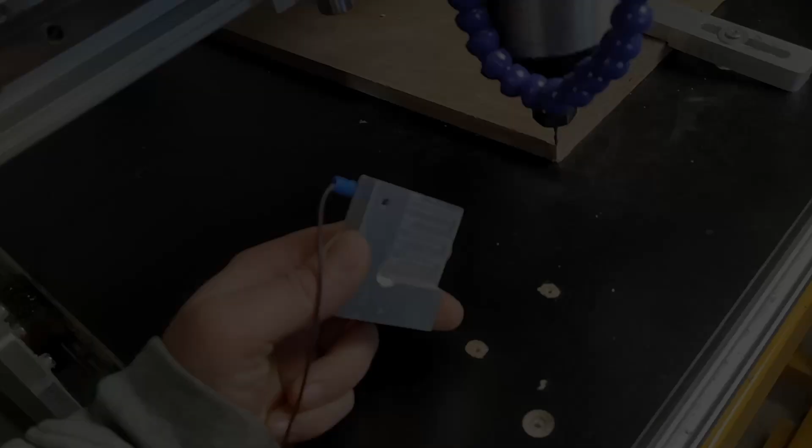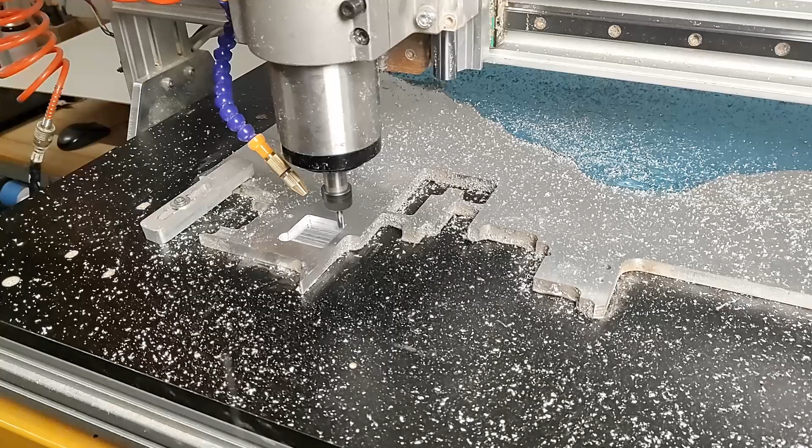In this video I'm going to show you how I made this probe in order to easily find the X and the Y 0, also the Z 0, but for that I already had a probe. I'm going to model it, make the Gcode, go to the CNC and mill it, and you will see along the way that I made some mistakes and I'm going to tell you how to fix them, how to make everything work as it should.

In the end, I'm going to show you how to set up Universal Gcode Sender and how to use the probe module in order to easily find the origin whenever you have a workpiece that is not in the origin of the machine. So let's get started.

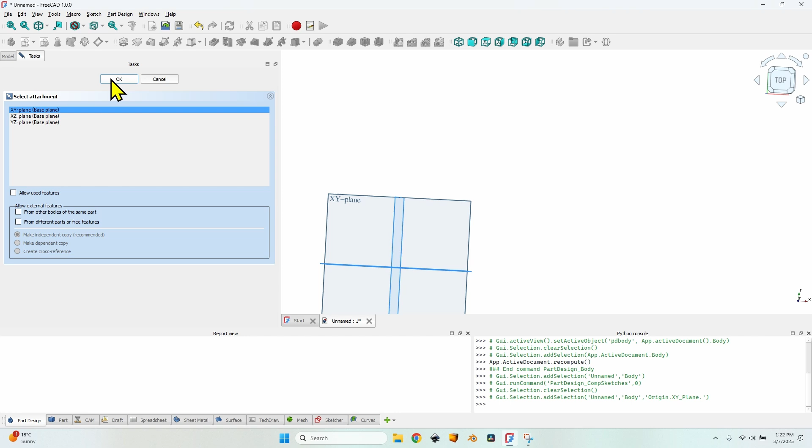Create a new sketch in the XY plane. And in this sketch I will define the overall shape of the probe, which is going to be a rectangle 60 mm by 60 mm. As you can see, setting the dimensions in FreeCAD 1.0 is much easier than in the previous versions. The sketch is already fully constrained. I can close it and make a pad of 12 mm.

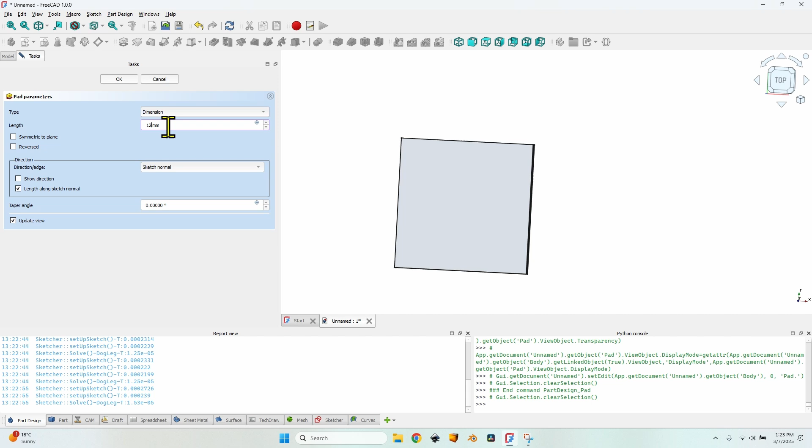You might ask why 12 mm? That is because 12 mm is the thickness of the aluminum plate that I had around. That's what I'm going to use, so if you are using a different thickness, don't forget to modify the length of the pad. Now I can close the pad, and after selecting the top surface, I will create a new sketch.

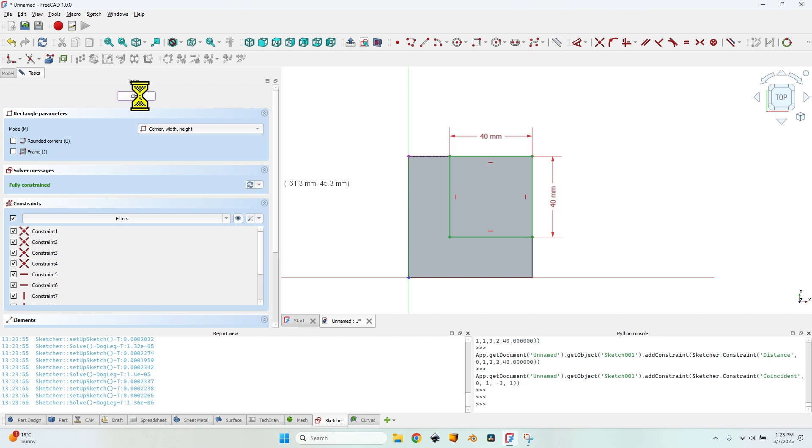Using the external geometry tool, I will select the top line and then make a new rectangle starting from here, and now I'm going to make it 40 by 40 millimeters. The sketch is fully constrained. I can close it and make a pocket using this sketch, and I'm going to mill half of the total thickness to have 6 mm for the probe.

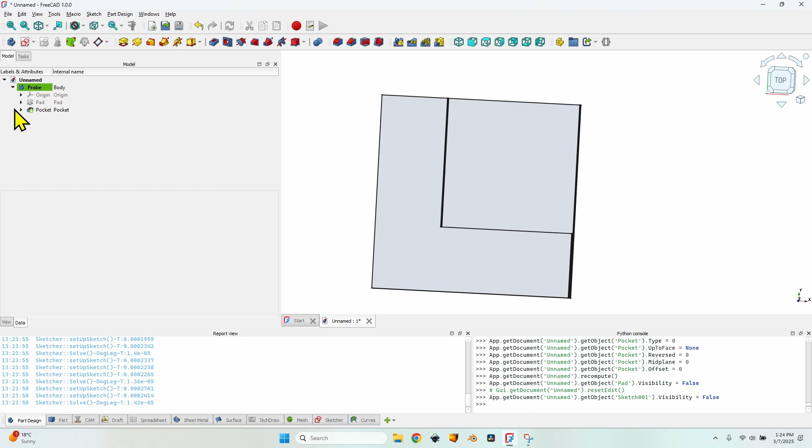What I don't like about this rectangle is this corner, which will result in a round over here because of the toolbit, and I want to have a notch here in order to be able to correctly fit it on the material. For that I'm going to edit the sketch a little. Let's zoom in, and I will create a circle close to this corner but not exactly in the corner, and I will give it a diameter of 12 mm.

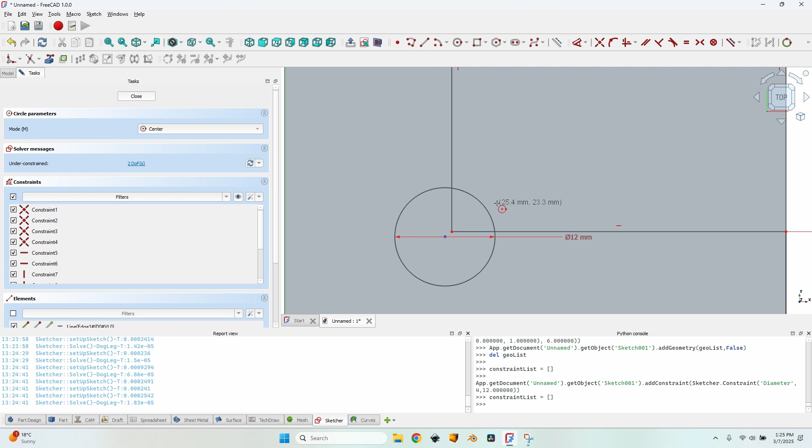Why 12 mm? Because the toolbit that I'm going to use is a 6 mm toolbit, and I want it to easily enter in this little notch to avoid any kickback, any damage to the toolbit. Using double the diameter will make sure everything is okay. Of course, this kind of sketch with overlapping lines is going to throw an error, so I'm going to select the trim tool and remove these 3 lines.

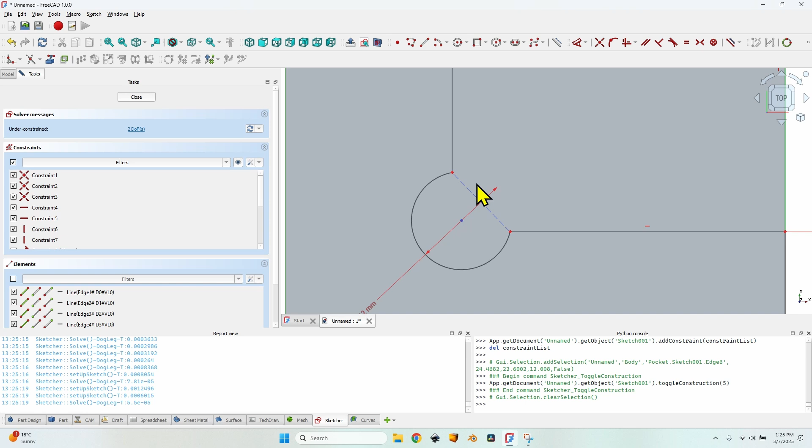Now I want to position the circle, and for that I'm going to create a new line between these 2 points. Right click and select the line again, turn it into construction geometry. This means that this line is not going to be taken into account when making pockets or pads. And select the line, the center of the circle, press KD to set a distance, a free distance, and I'm going to use a 2 mm distance.

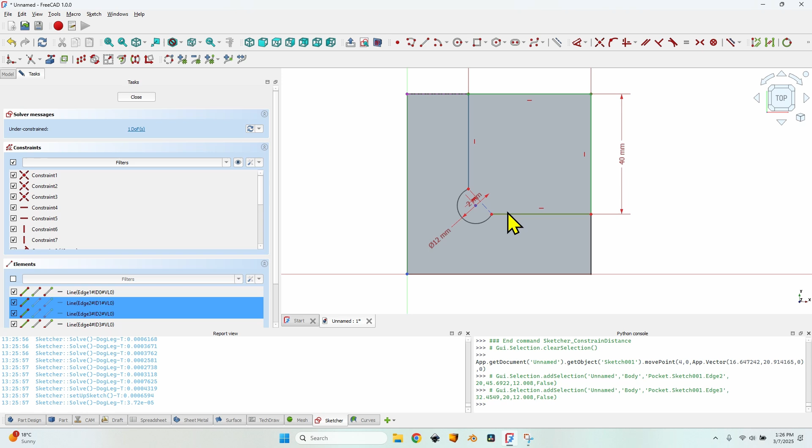After that, as you can see, I still have 1 degree of freedom in the solver messages box, which is this movement. I want to make it fixed. For that I will select this line and this line, press E to set an equal constraint. Now, since these 2 lines are equal, everything is perfectly determined. Closing the sketch will reveal the new pocket, because as you remember, I've edited the sketch in the pocket already created. I still need to do one thing, which is a hole here, a hole for an M5 screw.

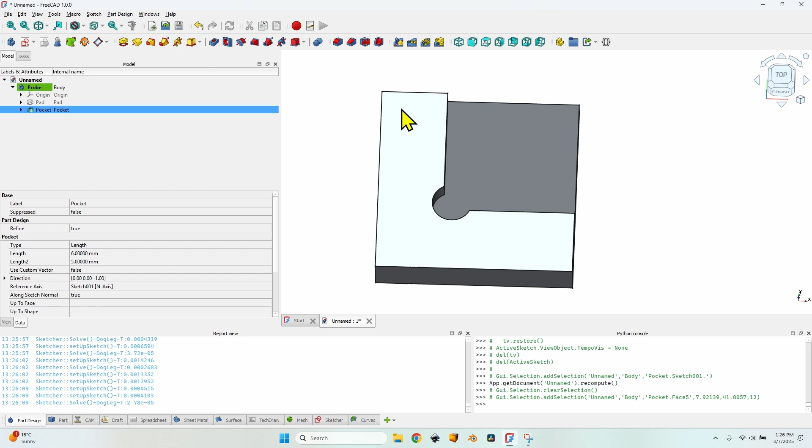I'm going to make the hole a little bit smaller, of course. The diameter of the hole for the M5 screw is 4.2 mm. So let's create a new sketch. Create a circle of 4.5 mm. I'm going to use a slightly larger diameter because the toolbit will have a little bit of deflection. I want to make sure I won't damage the tapping tool, so I'm going to use a slightly larger diameter.

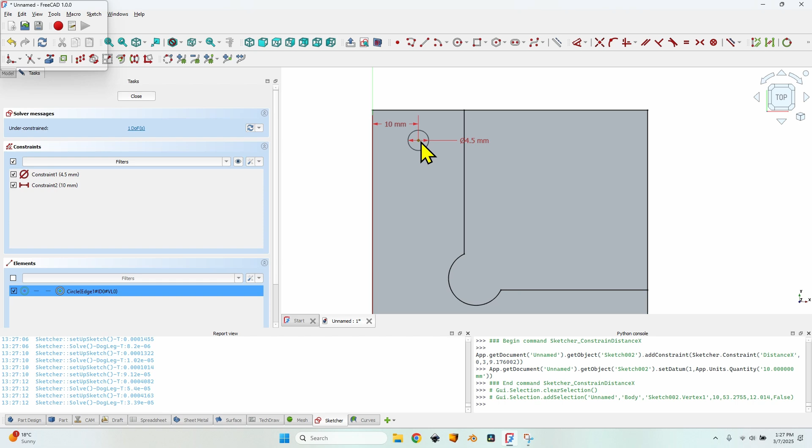I will select the center of the circle, place it in the center, so 10 mm, and a vertical distance of 50 mm. Close the sketch, make a pocket. This time I'm going to use the through all type. Now the probe is ready, I have everything that I wanted to have, and we are going to the CAM workbench.

I'm going to select the object, create a new job, click on the OK button. In the setup tab I won't change anything because I've modeled it starting from the origin and the origin is correctly placed for the machine. I don't want to change anything. Let's go to the tools menu, click on the add button to add a toolbit. I'm going to use the 3.175 for the hole and add a second toolbit, the 6mm end mill for milling the pocket and the outline of the probe.

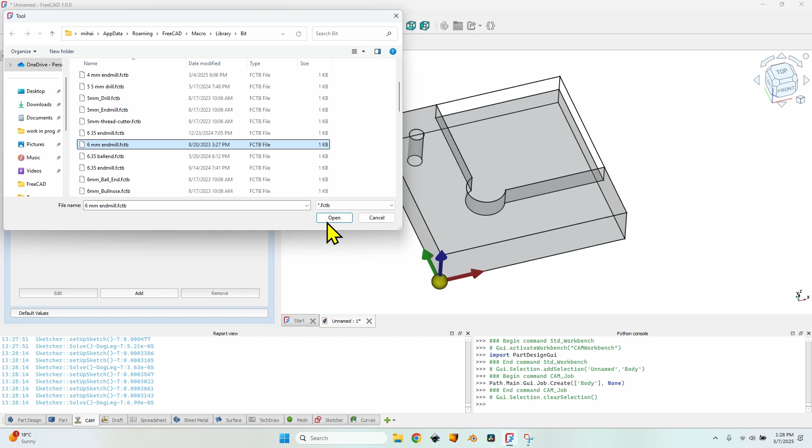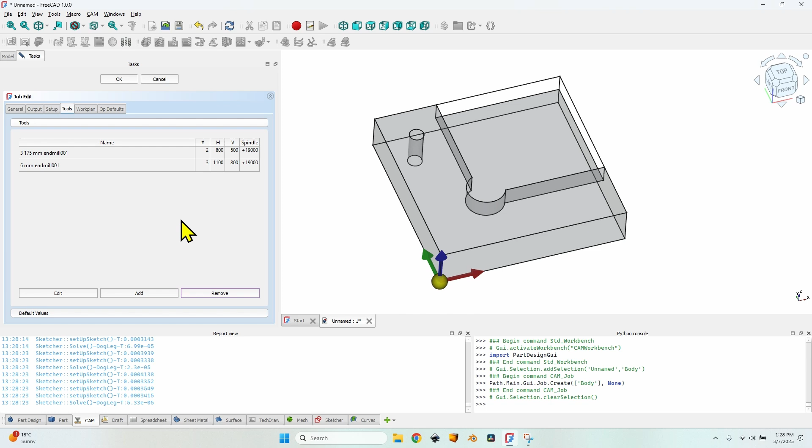Now let's give them some speeds. Since I'm milling aluminum and I will use a step down of 1mm, I'm going to use smaller speeds for the 1/8 of an inch toolbit and the spindle of 19,000, and for the 6mm end mill I'm going to use a slightly larger speed. The same spindle speed, and I will remove the default tool. It is useless here. It was there just to be able to create the job because it needs to have a toolbit. I will click on OK to close the job, and now let's start creating the operations.

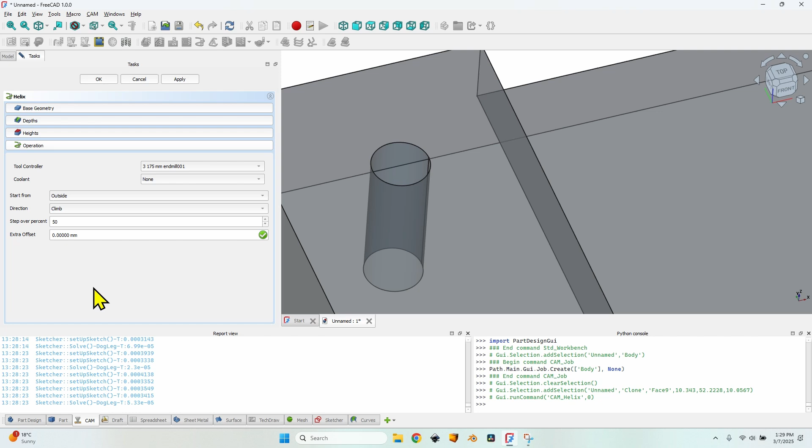First I will select this wall and the Helix tool. It will ask me which tool controller to use. I'm going to use the smaller toolbit. Click on the OK button. Let's go to the depth tab because the default step down is the tool diameter. I don't want that, but I cannot edit the value by simply clicking here, so I will have to edit the expression. I will click on the clear button. Now I can edit this value. I'll write 1 for a 1mm step down. In the operation tab I don't have to change anything because it's a very small hole, so just click apply, make sure the toolpath is OK, click on the OK button to close this operation. You can see it here in the list.

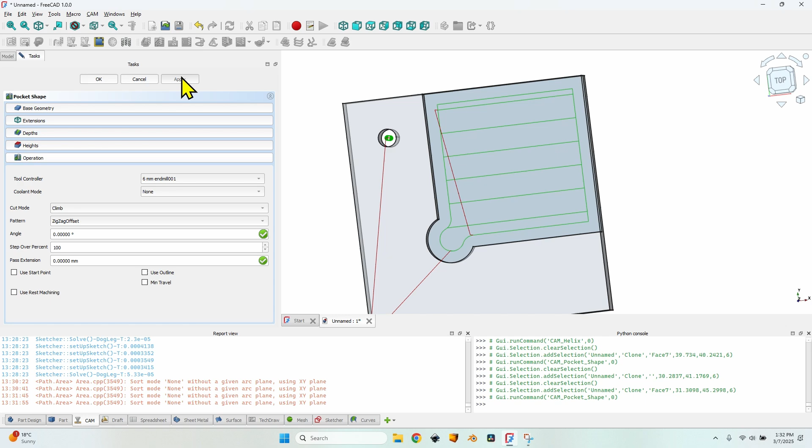Now let's create the pocket for this cutout. Select the surface, click on the pocket button. The first thing that I want to do to remember is to change the tool controller. The default tool controller is the one used for the previous operation, which is the smaller one. I'm going to select the 6mm end mill and click on apply to see what happens. As you can see, it's a horror toolpath, and that is because of a few things. First, the pattern, change it from zigzag to zigzag offset. And I want to change the angle from 45 degrees to 0 degrees, which means along the x-axis. I'm doing that because my machine is much more solid on the x-axis and I want to use that axis as much as possible. If I rotate the view, I can see that I only have one pass, which is absolutely too much for milling aluminum, or at least on my machine.

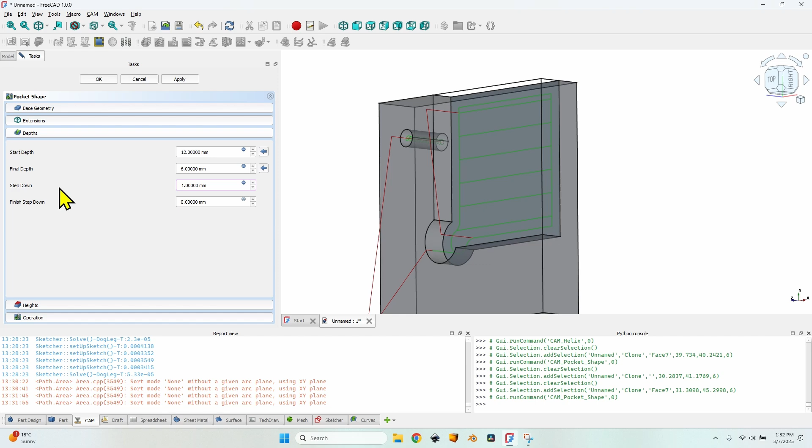So let's go to the depth tab and change the step down. Since it's a 6mm end mill, the default step down is the 6mm. I want to change it into 1mm, but I cannot click here and edit because it's based on an expression. So I have to click this little blue circle, click on clear to remove the expression, and now I can write a step down of 1mm, click on apply again, and as you can see, I have several layers.

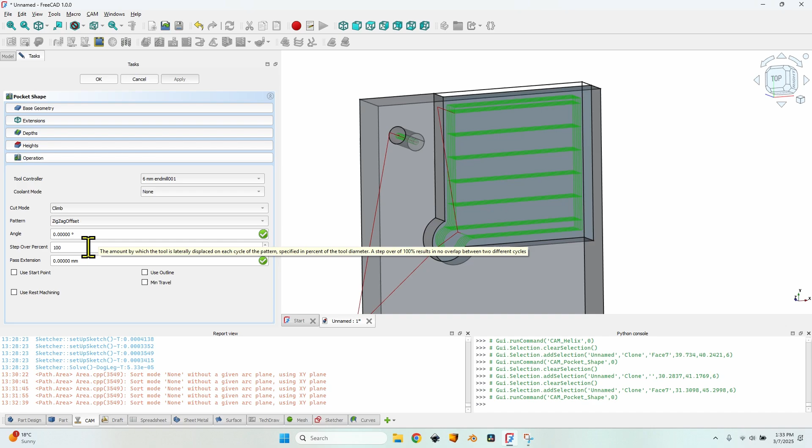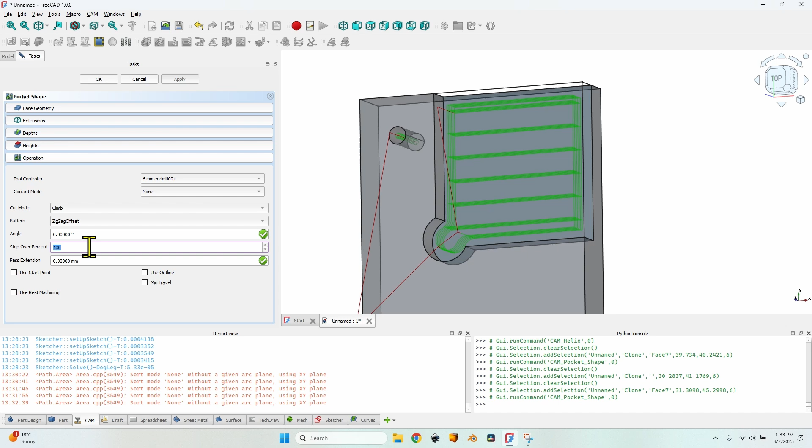One last thing that I had to think about in the operation tab was the step over. The default 100% removes as much material as possible, and I thought, well, it's just about material removal, so I can leave it like that and everything will work okay. But here comes the first mistake that I made. Using a 100% step over, and because the toolbit still had a very small deflection, left some very thin shims in the center. I could have removed them using a file, but I think it's much better to have a flat surface from the CNC. So I went back to FreeCAD, changed the step over from 100 to 80%.

The last operation that I want to create in FreeCAD is the cutout, the profiling. But there's one little thing that I missed when creating the pocket. I was very nervous because it was the first time that I was going to use only air cooling. Until now I used some hand spray with a cutting oil, and I had this small improvement to my CNC, the compressed air nozzle, and I wanted to see how it works in aluminum without any liquid, just with air. Because I was thinking about that, I forgot something.

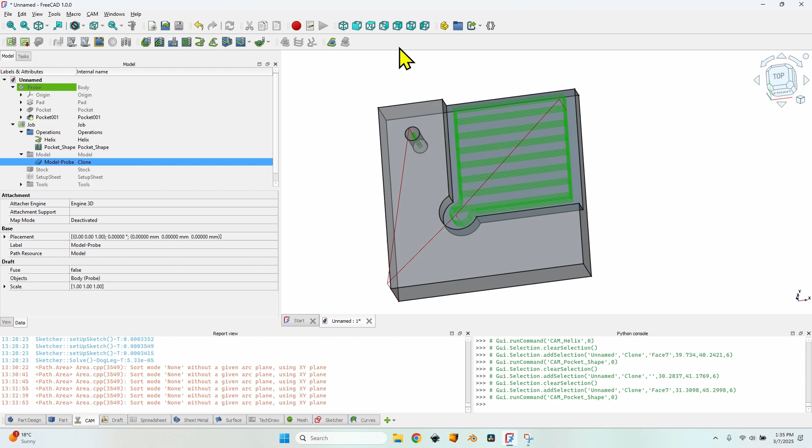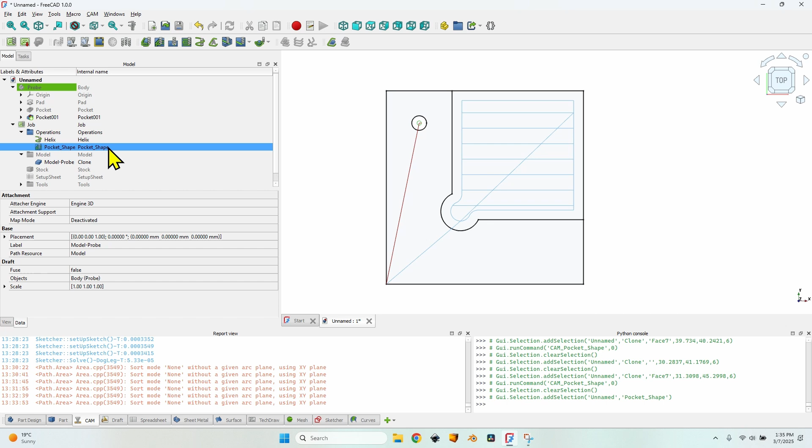Let me show you from a top view, and you can also see on the piece here. The corners had small roundovers. In my situation, because I realized that just after milling the piece and removing it from the table, I used the file and I removed that material. I don't suggest that. And let's fix this in the pocket shape operation. So open the operation, go to the extensions tab, check the enable extensions and check the face that is here. You can click on it and see its outline. Now if I click apply, you can see the toolbit is going to go all the way to the corner of the material.

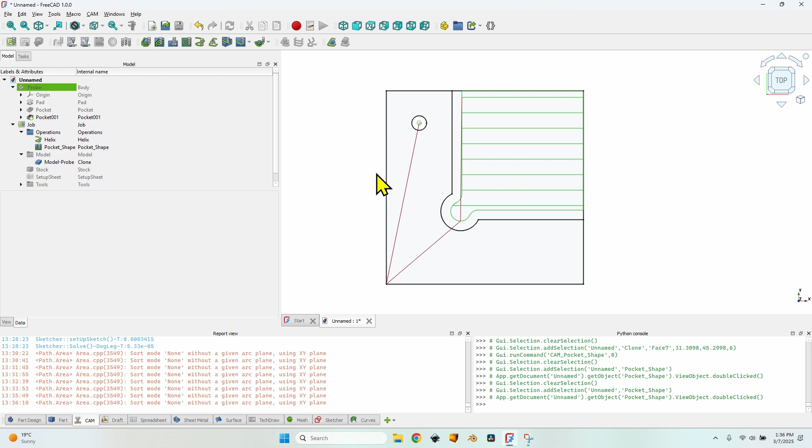This will result in a perfectly flat edge both here and here. So now I can close the pocket shape operation and proceed to the last one. I don't need to select anything for the last operation because it will by default mill the entire outline of the object that is in the job.

So click on the profile button, go to the depth tab to change the step down. This time the toolbit that defaulted in the operation is a 6 mm because for the last operation, the pocket, I already used this. You need to make sure each time you set a new operation, use the proper tool controller, double check it in order to avoid mistakes.

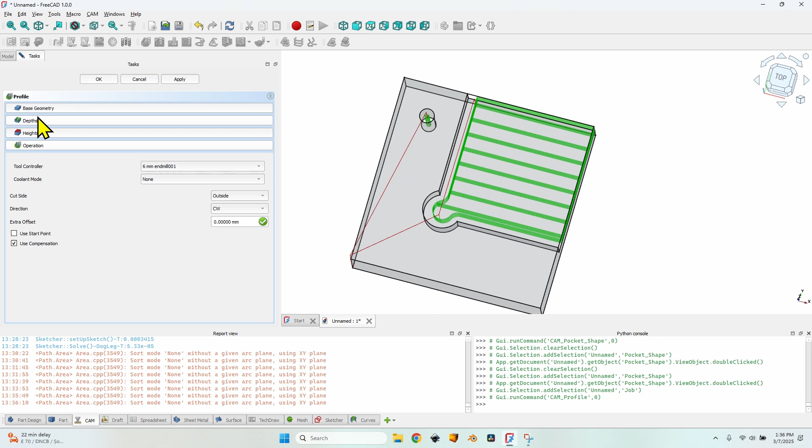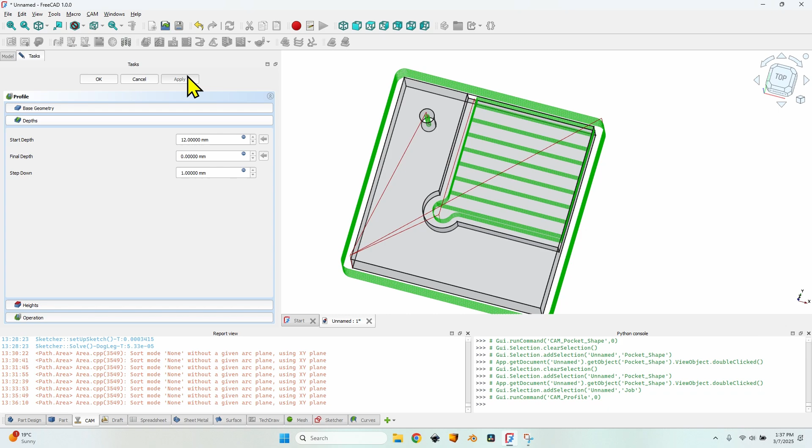Now let's go to the depth tab and again change the formula for the step down. Click on clear to remove it, or I could simply divide the tool diameter by the tool diameter itself, and this will always result in a step down of 1 mm. It doesn't really matter, you just have to have a step down of 1 mm. After clicking apply, let's double check the toolpath, everything is okay.

Click on the OK button, but I need to fix something because this piece is going to fly away. I need to add some holding tags. In order to create the holding tags, I first have to select the operation, go to the CAM menu, path dress up and select tag from here. The default number of tags is 4.

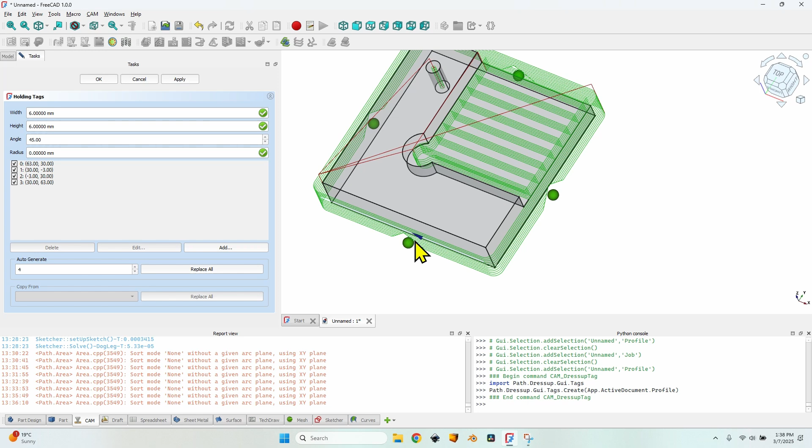I can see them placed around, but I only want to place them on these two edges because these two edges need to be really flat. Creating tags there and removing them using sandpaper or a file probably won't result in a flat surface, and I don't want that. So let's move 2 of them. I will select it from the list. Let's see which one I want to move. This one, click on the edit button and place it somewhere around here.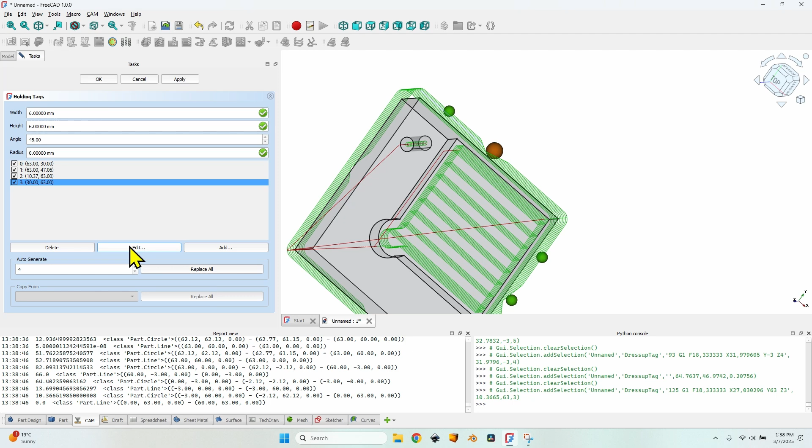It doesn't matter which layer you are selecting. Now let's find out which one is this. Number 2. Click on the edit button and place it somewhere around here. But I also want to move these two a little bit. So the top one is number 3. Click on edit and select a point a little bit to the side. Now let's do the same for the first one, which is in the middle. Click on edit, move it. Now if I click on apply, you can see the tags have moved.

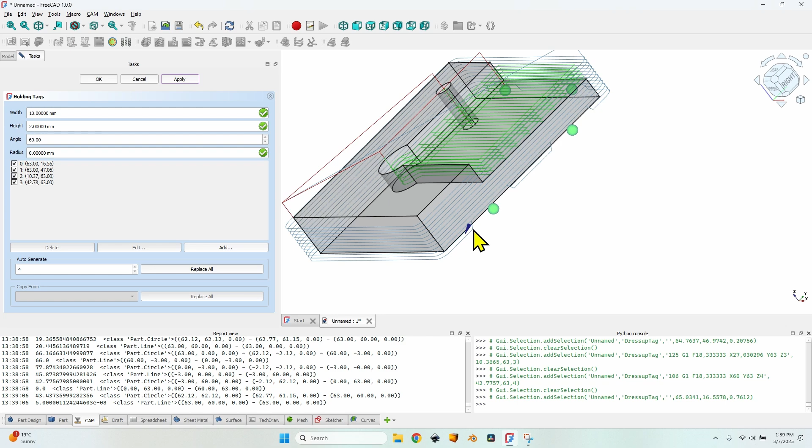What I still want to change is their shape. I'm going to use a width of 10 mm, a height of 2 and an angle of 90 degrees. But what if your machine has some problems with the plunging? Well, you could change the angle to 60 degrees and this will result in a ramp entry sort of plunging. So after clicking on apply and making sure everything is okay, I can close the operation.

Now that everything is ready, I have to export the job, go to Universal Gcode Sender, go to the workshop and mill the actual piece out of aluminum. Since I'm using 2 toolbits and I don't have an automatic tool changer for the machine, let's go to the job again, go to the output, change order by from fixture to tool, check the split output, and now I can close the job. After the job recalculates, I have to select it, click on the post processor, and I will have 2 Gcodes, one for the smaller toolbit and one for the larger toolbit.

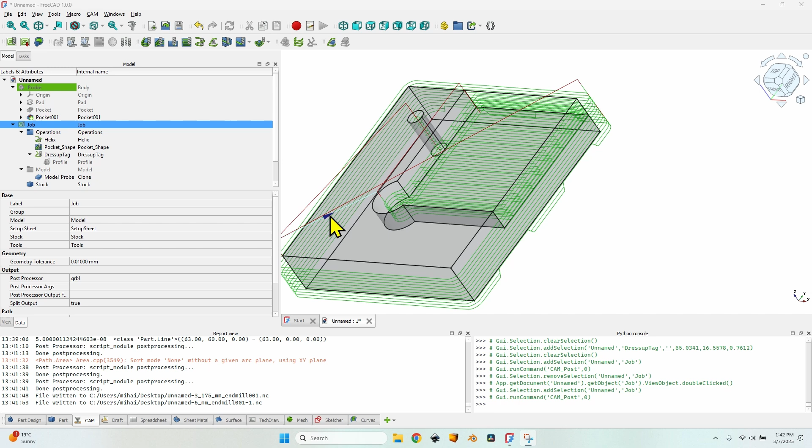Now let's go to the CNC and make this plate, make this probe, and I will also show you how to use it in Universal Gcode Sender.

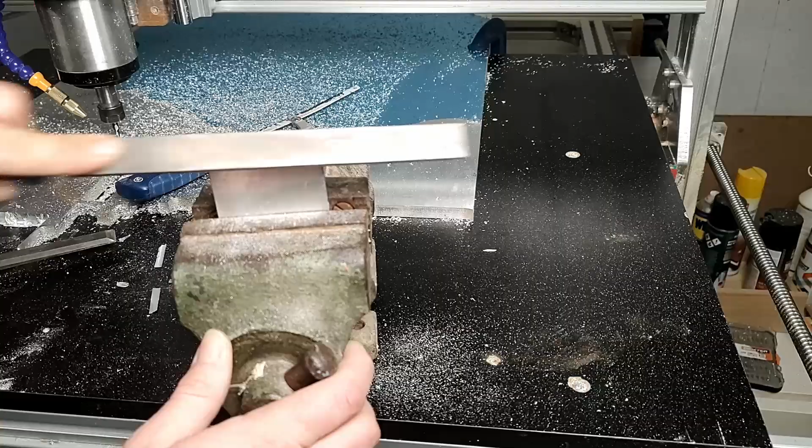The first thing that I want to do is to move the tool bit closer to the position that I want to find. I'm going to move it pretty close to the X, Y, and Z of the corner of the board. I will set the probe's movement range to be within 1.5 centimeters from the corner of the board. I think it's enough. I can visually place it in that area, place the probe, and then run the script to find the exact corner of this piece.

Let's move it a little bit to the right and a little bit backwards. Now I'm going to place the probe in the corner of the workpiece. You can see that I have this cutout here, just as I told you. If I didn't create this notch here, the corner would be round and that would prevent the probe going to the exact corner.

Raise the Z a little bit, place the probe as much in the corner as possible. Well, I also have to take care of the cables, and I will connect the clip to the tool bit, and I will also fit the cable around some piece of the spindle in order to avoid it being dragged out of the table. So the probe is where it should be. Now let's go to Universal Gcode Sender and set up the routine. As you can see, my X, Y and Z are some random values.

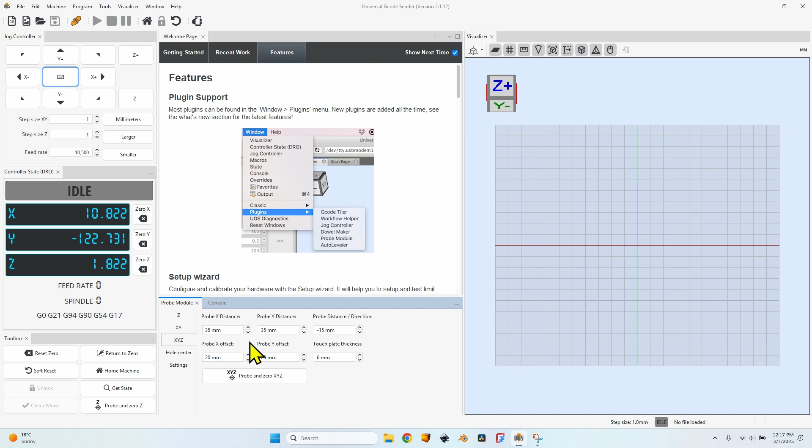I will go to Window, Plugins, and here I have the probe module, where I already have the settings that I have defined, but I'm going to explain them one after the other. Sometimes you might end up with this very nice view of what the probe is going to do. Sometimes you won't if you don't go to console and back to probe module. A visualization of what will happen will show on your screen.

Now I have these values. First I'm in the XYZ probing because I want to set all the three axes. I have a probe distance of 35 millimeters. Why is that? Because my probe is 20 millimeters away from the workpiece, as you remember from the design stage, and I want it to move 15 millimeters outside.

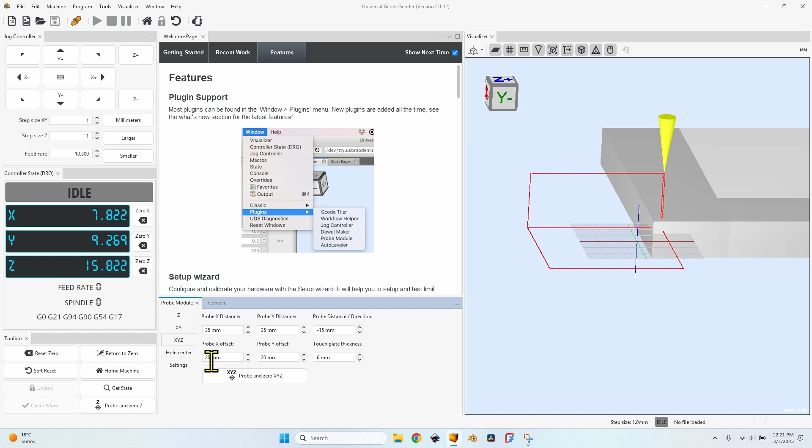That's why I was telling you I can set the tool bit up to 15 millimeters to the inside on X and Y. Otherwise, when moving to the outside and going down, it will hit the probe. So make sure this distance is at least equal to where the tool bit is on the workpiece. I think 15 millimeters should be fine. Setting them both on X and on Y. I also need to set the offset on XY, which is 20 millimeters, again, as you remember from the design stage.

I will set the distance on the Z-axis of minus 15 millimeters. This is the total distance. It will lower the tool bit. Make sure to set the distance smaller than the distance from the tip of the tool bit to the table, because otherwise it will plunge into the table and you don't want that. At the bottom we have the offsets on X and Y and the thickness of the plate, which is the thickness on the smaller part where it touches the material.

After setting everything, I can click on this button. Just for safety reasons, I will also hold my hand over the stop button or the power off button. Let's click this button and see what happens.

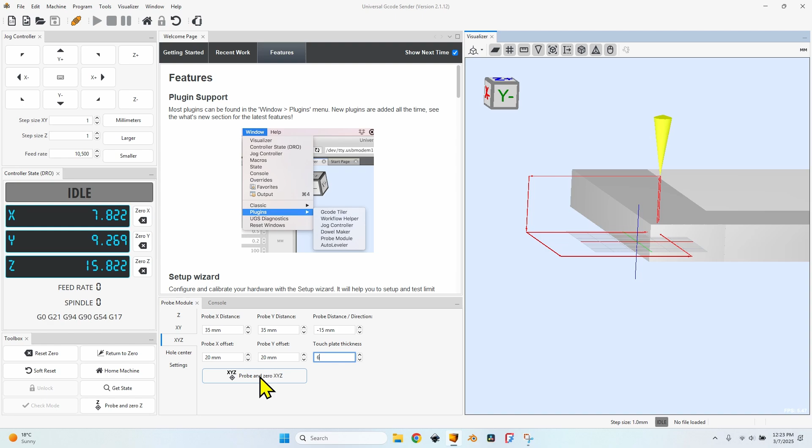But I stopped the routine because I forgot to show you the other panel for settings, which is essential for what we are doing. The settings here, where I can set the tool bit diameter. If I don't set the tool bit diameter correctly, the X and Y won't be the correct ones. The Z will be correct, but X and Y won't. And the most important settings, the fast find rate and the slow measure rate. In my situation, I think 100 with 50 are okay.

If you set too high values, the machine won't be able to stop when touching the probe, and you will end up with some damage either to the tool bit or to the probe or to the machine itself. So make sure you use small enough values at first, then maybe increase them if you find that your machine can handle it. The retract amount, of course, is the distance to retract between the two cycles, between the fast find and the slow find.

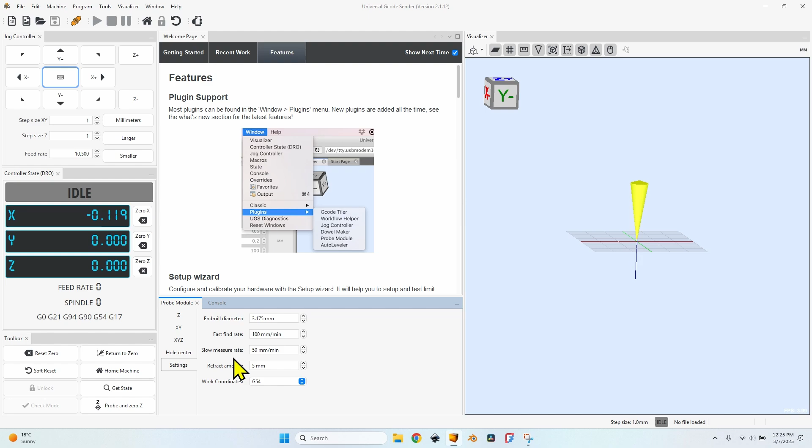And the work coordinates, this time I'm going to use G54, but if you have several work coordinates, several fixtures on the table, you can set the 0 for each of them, then you can run the program with various work coordinates. I'm going to leave it to G54, so let's go back to XYZ and start the probing again.

As you can see, at first there is a faster movement and the second movement is slower. The X and the Y motors make much more noise than the Z motor because they are different drivers.

And now, after finishing this cycle, the machine moves exactly where it started. As you can see, my coordinates are not correctly set. They are 0 on each of the axes, which is not true. I believe this is a bug. Running the script again. So it goes back to 0 and then resets all the values to the correct ones calculated based on the probing.

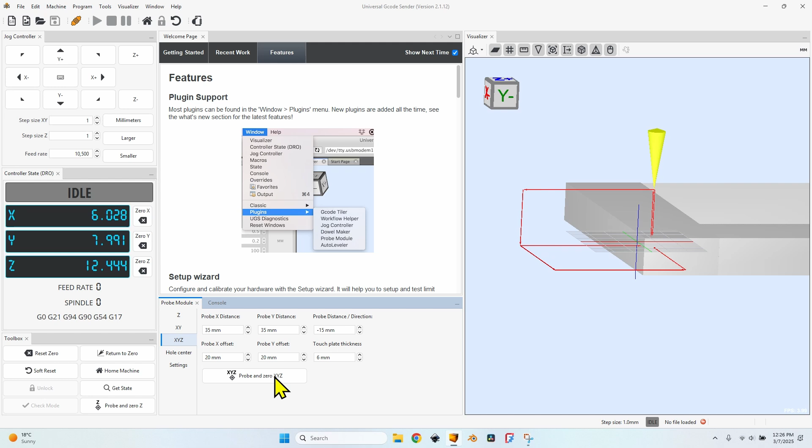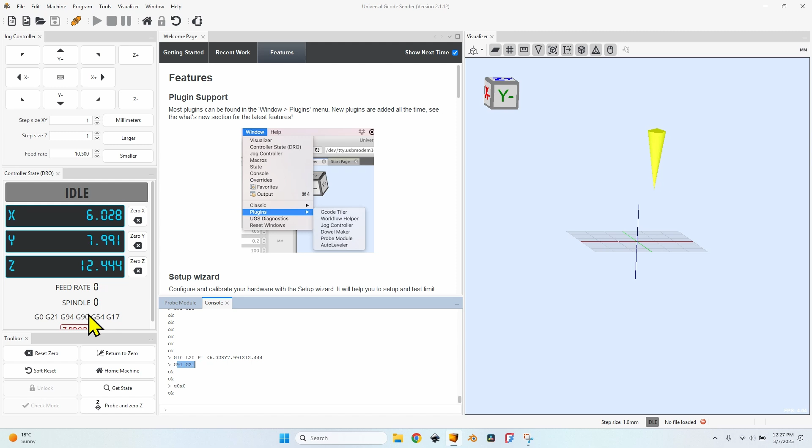One more thing you need to know before proceeding to making the actual work is go to console, and as you can see here it entered G91 mode, which is incremental mode. Let me show you what happens. I will remove the probe now, I don't need it anymore. If I write here G0X0, it does nothing because of the G91. I don't know why it tells me here it's in G90 mode, because I can see the last command here, so it's a bug from Universal Gcode Sender.

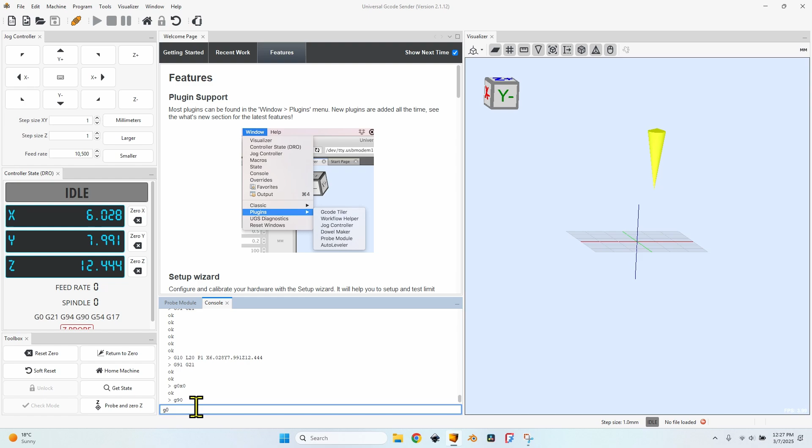G91 means incremental mode. G0X0 means move 0 millimeters on the X-axis, and that's exactly what it does. In order to go back to G90, I will simply write G90 in the console, press enter, and now if I press G0X0, you can see the machine moving to the origin on the X-axis. Now let's move it on the Y-axis and finally on the Z-axis. As you can see, the center of the tool bit is exactly in the corner of the material. So this is my simple build, my simple probe.